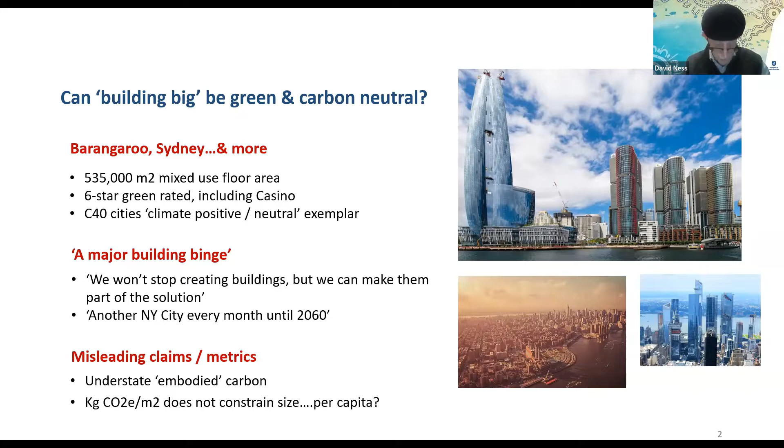So the urgent need to bend the curve. Meanwhile, the Intergovernmental Panel on Climate Change stresses that aggressive and immediate mitigation policies with rapid and deep changes in demand are required to bend the emissions curve by 2025 and limit warming to 1.5 degrees. So that's a very strong message from the IPCC.

Sorry, I'll just go back again. I missed something I wanted to say. And this applies not just to climate, but other forms of pollution and biodiversity loss. And not just to buildings, also to lifestyles, including mobility, our food, clothing, etc., and also, of course, infrastructures. But to achieve 50 to 60% cuts in building carbon by 2030, as UNEP argues we need, drastic and different actions are required.

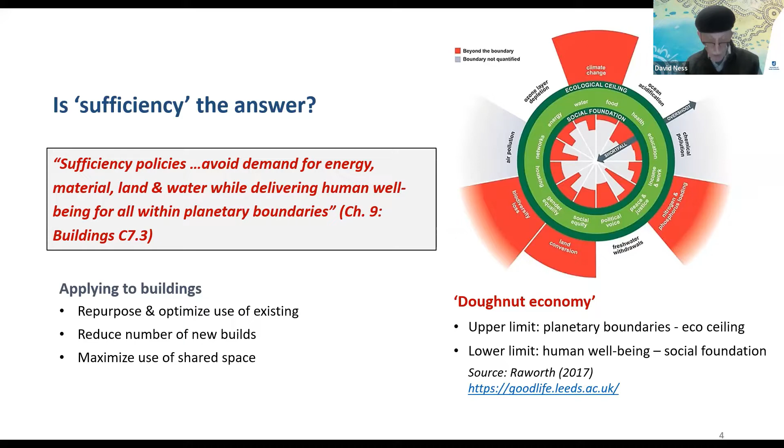And sufficiency in building, as I've noted there, includes repurpose and optimise use of existing buildings, reduce the number and floor area of new builds, and maximise use of shared space.

Yamina argues this reduces the cost of buildings without reducing well-being. And also, while efficiency is incremental, sufficiency can achieve a major shift. Pardon me.

So I wish to put forward this proposition. We can only bend the curve by 2025 if we drastically reduce the amount of new construction and floor area by not building at all, building less, or adapting existing stock, and if we begin in the global north.

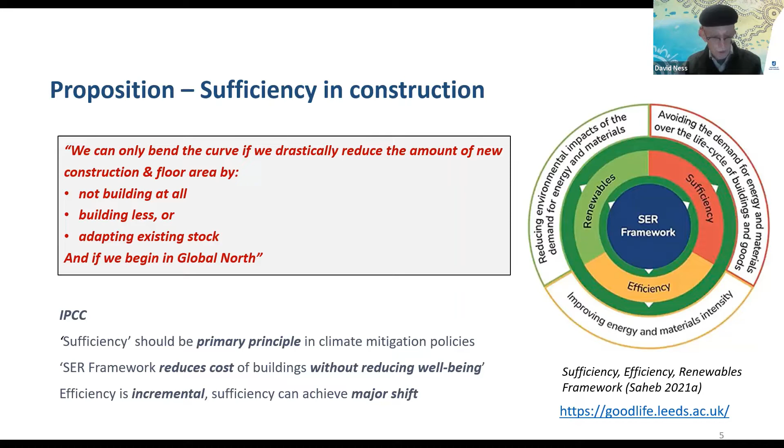The importance of early decisions in achieving this. To make drastic cuts by 2025, we must influence upfront strategic decisions.

This carbon reduction curve is actually from 2013, but it's also reflected, I think, in the standard PAS 2080. It shows more carbon can be reduced in the early stages of projects, especially upfront carbon associated with new construction. As I understand, this is responsible for around 70 to 80% of life cycle embodied carbon.

A build nothing decision in the early planning phase may achieve 100% reduction by challenging the need and exploring alternatives to achieve the desired outcomes. While build nothing may achieve 100%, build less can reduce carbon by 80% by using or adapting existing assets.

And going down further, building efficiency or build clever, such as with low carbon materials including timber, can only achieve 20 to 50%. But this bottom area is where the industry is focused. But a 50 to 60% cut in carbon is required by 2030, as I said before. So I'm arguing that our attention must really shift to this top area, the top left.

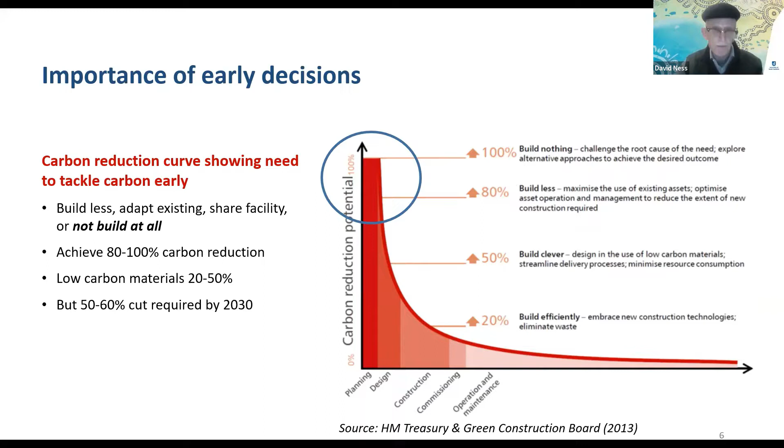So what are current policies and what kind of shift is required? Circularity and net zero, not enough. You may not agree with this, but this is what I truly believe.

Current practices are a long way from sufficiency, as we saw in the first slide showing growth in commercial real estate. And although sufficiency is related to circularity, the IPCC states, quote, claims on the benefits of circular economy for sustainability and climate change mitigation have limited evidence.

This may be because circular economy, as practiced, often does not achieve absolute reduction in consumption carbon and is seen, such as by Ellen MacArthur herself actually said, as offering better growth, not avoiding and reducing consumption and growth.

But circular economy, of course, has its place. And my colleague Ke-Jing and I, as Jeremy mentioned in the intro, cooperated with Arup in adapting circular economy to the built environment and developed a platform for reuse of components.

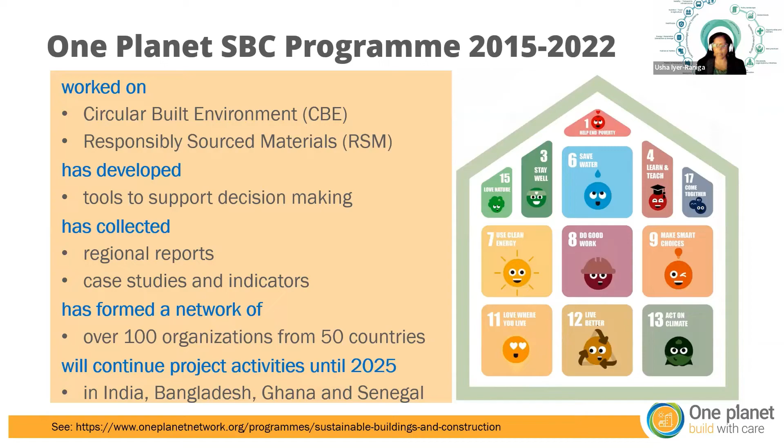So let's pause and focus on why we're looking at the built environment sector. Why is it so critical? Well, because we know the built environment is a high resource use sector. It's got a very high environmental impact, but it's also a major source of environmental harm. We know the built environment consumes about 40% of global raw materials.

And it's not just in the construction phase of buildings, which is a point David made, but we also need to think about resource use during the operation of buildings. Increasingly now, I think we also need to think about end of life of buildings - how do we design buildings so we can deconstruct them at the end of life and reuse those materials as much as possible, along with other things David mentioned, such as building more modular, flexible buildings that can become multifunctional over time.

We also know that in the process of operation of buildings, 30% of waste is generated, and this waste has to go somewhere.

So if we can start looking at reducing that waste, or moving towards zero waste, is something for us to start thinking about. We also know that it's not just about solid waste, but also liquid waste and the use of water in buildings - not just at the point of construction, but also in the operation of buildings.

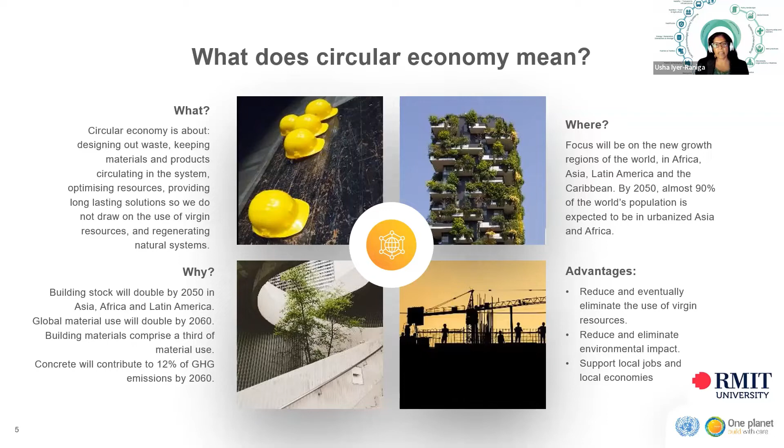So what are some of the ways for us to think about this? We know that some countries have responded to the Paris Agreement through nationally determined contributions and have put buildings and construction or the power sector front and center of signing up to ensuring that changes are being made within their own countries. But we also know that a lot of work is being done, particularly by the Global ABC, but also by UNEP and organizations like the International Finance Corporation, in looking at how we can bring in energy efficiency practices, green codes and green building practices into some of the developing world.

And I think that's a really important starting point because it acts as a level playing field. We also need to start thinking about how do we ensure that we start increasing the stringency over a period of time.

It's not a case of developing building codes and then not having a good mechanism in place for ensuring that these policies are actually policed, so that they actually give us the results we're looking at in terms of energy efficiency reductions and so on.

We also need to start thinking about the role of planning and building, because our cities don't exist on their own, they're not just a conglomeration of buildings. There's infrastructure, there's mobility. We need to think about all the different scales: the building scale, the neighborhood scale, as well as the city scale.

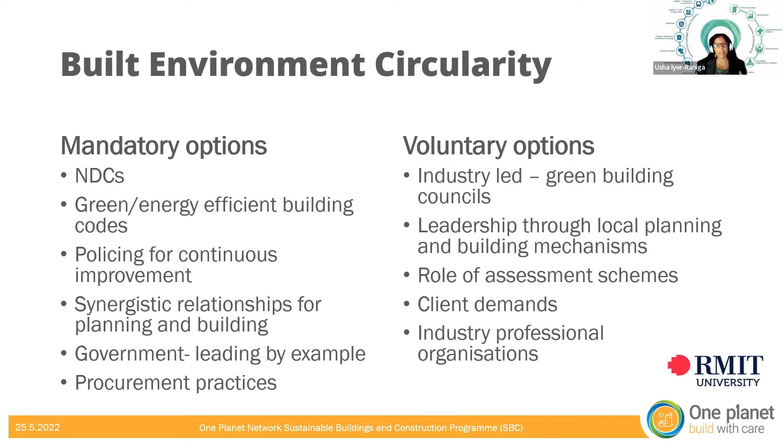So let's just look at the work that we did leading to the state of play reports, and the work that we're continuing to do.

It started off with presentations that we made in 2017 and 2019 in a pre-COVID world, where at the World Circular Economy Forum we started having discussions focusing specifically on buildings and the built environment. As I said before, that led to 7 reports and a global report, covering Europe, North America, Oceania, Middle East, Asia, Africa, and Latin America.

In addition to that, we also deployed an international survey where we've now got close to 200 responses from North and South, with about 82 responses from the Global South. And then we validated some of the findings of the surveys through workshops across Asia, Africa, and Latin America.

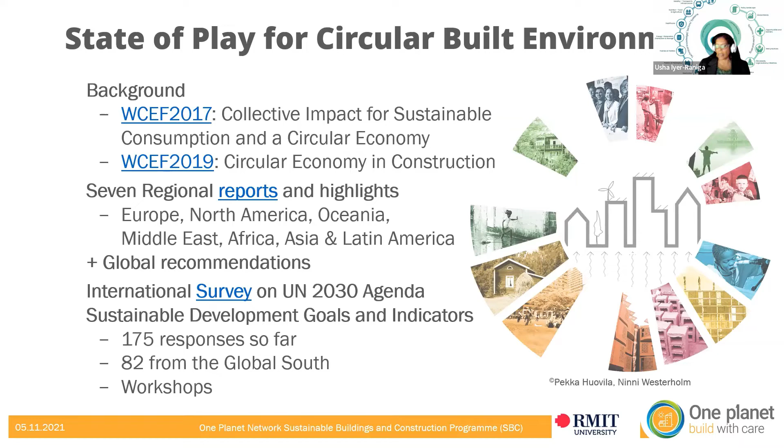So just very quickly, I'll go through some of the recommendations - 10 recommendations that have come out of these 7 regional reports, which we brought together with a global report.

Firstly, the really important thing is to start thinking about moving away from linear systems of operation, because if we don't recognize what the problem is, we're never going to be able to move in the direction of circularity. We believe that using the Sustainable Development Goals is a valid and good starting point to monitor, evaluate, report, and keep that as a way for us to fine-tune and build the stringency over a period of time.

As I've said before, we need to think about life cycle at the outset, because we're becoming quite good at energy efficiency. But then, the more energy efficient we become, or as we move towards net zero, the role of materials and the role of embodied energy becomes even more critical.

So at the moment, in Europe, and even in some buildings here in Australia, up to 40 to 50% of the full life cycle is about embodied energy. So it becomes really critical to start thinking about how we treat materials, what materials we use, how we build buildings, and how we ensure that we do not have waste resulting from the process of construction.

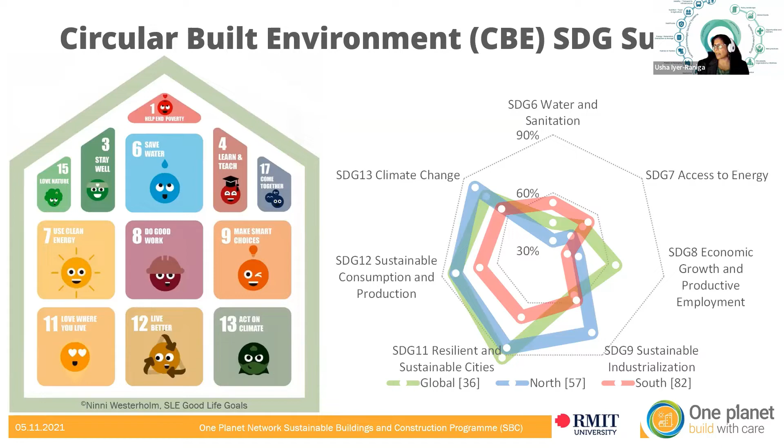We also see that SDG 9 and SDG 13 are also scoring quite high in the north. SDG 6 on water, SDG 7, is another area that comes into consideration when we think about both the south as well as looking at it from a global context.

Then when we look at the overall level, we also see some considerations around the importance of health, biodiversity, and partnership. SDG 17 scores really high globally, whereas SDG 3 scores very high in the south, and again SDG 15 scores very highly in the north.

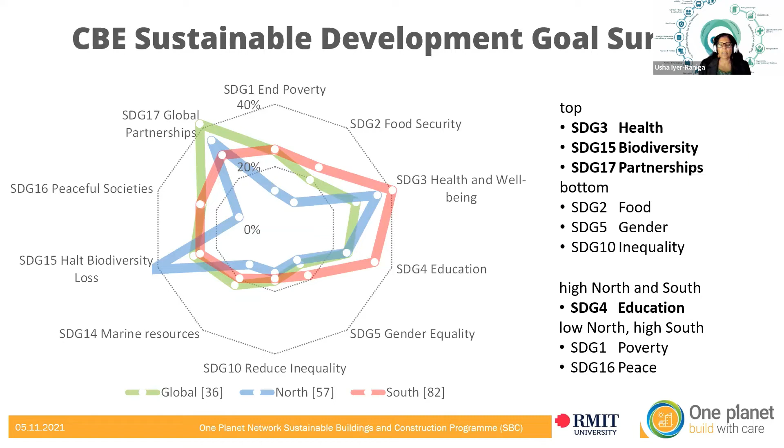In both the north and the south, the role of education is also quite important, and I think this is quite a good signal for us to take away. Given that this is looking at built environment, it's not surprising to see that food, gender, and inequality don't score quite as high.

When we started looking at an indicator level, we were really keen to understand what are those core indicators that would signal as important for circularity. What we found was that material footprint, which is the same indicator on 8.4.1 and 12.2.1, is important, as are rates of recycling and the use of local materials, which sits under 11.c.1.

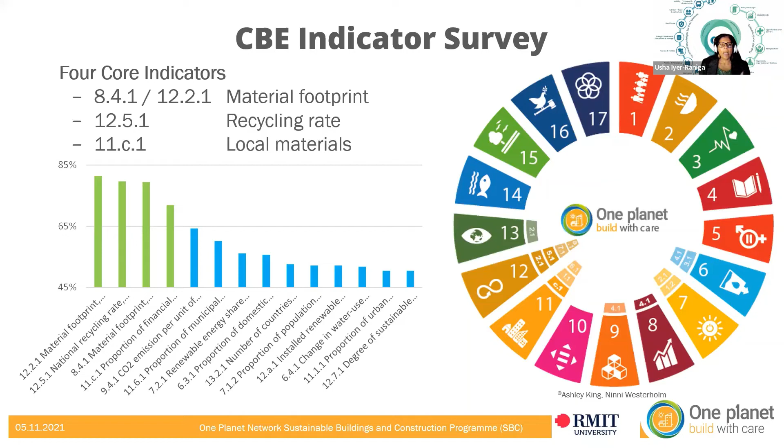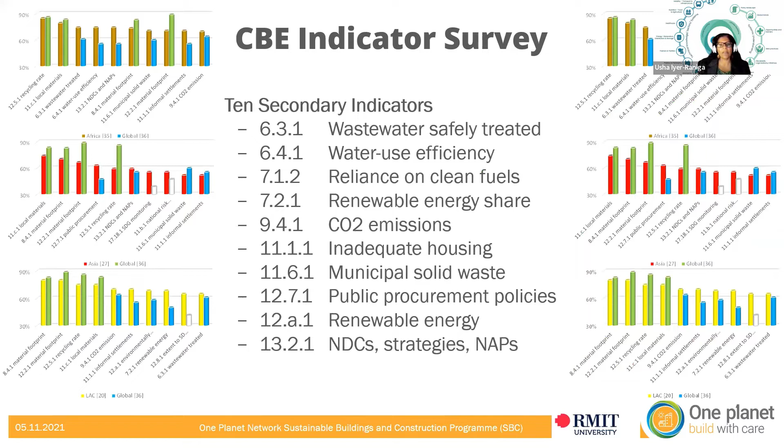And then a range of secondary indicators, looking across water, energy, carbon emissions, cities, housing, and also on consumption production, but also on climate change. So these are the other 10 secondary indicators that rank very highly in the work that we do.

So where to from here? The work we're doing is now looking at increasing the amount of case studies that we have done. We've gathered case studies, and you'll find all of this on our website. We've got case studies from a number of Asian, African, and South American countries.

But we're also looking at, rather than working just with governments, can we also start looking at working with industries, and start looking at how some of these indicators can be used for reporting at a project level, because a lot of industries are looking at how they might report SDGs. It's a good way to bring project level thinking into reports that companies may sign up to as part of ESG reporting on SDGs.

Last year we launched the latest report at COP26, but we're now looking at developing that further to scale up beyond the countries that were part of our case studies, to include a further number of countries and increase the sample of case studies.

But we're also interested not just in north to south learning, but also south to north learning. There's some really interesting work that came up in one of our meetings in Amsterdam, where some of the indigenous type of thinking and learning can also be applied into the northern context, but also between the south and the south.

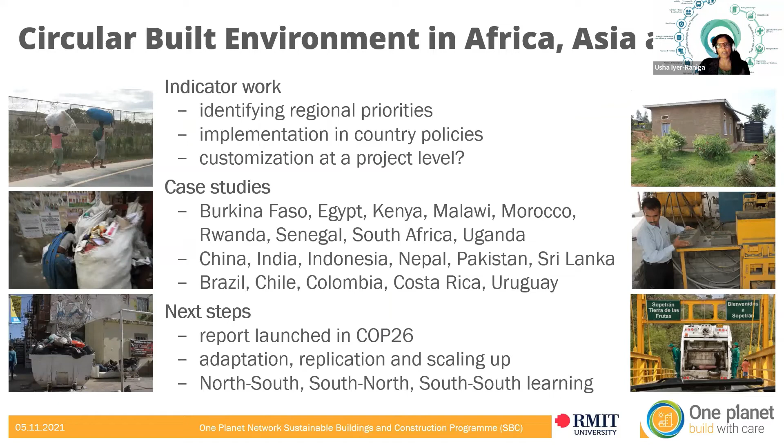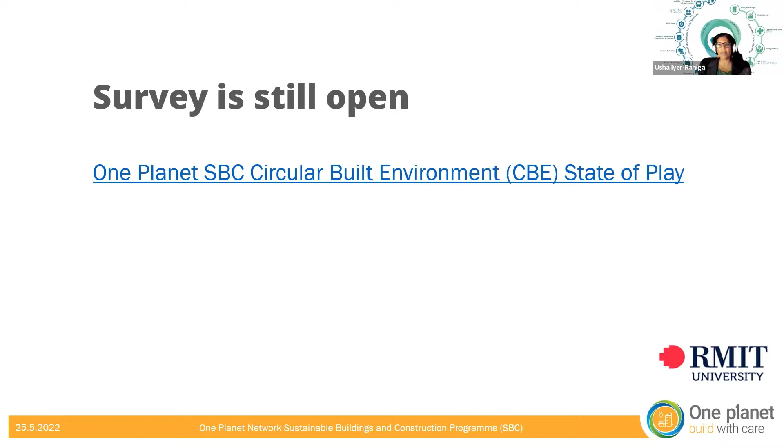So I just wanted to let you know that the survey is still open. If you're interested in responding to the survey, we would certainly appreciate that. And if there are any questions, I'm happy to take that at the end. I'll leave it there.

I think I went a few minutes over, Jeremy, so apologies. Thank you.

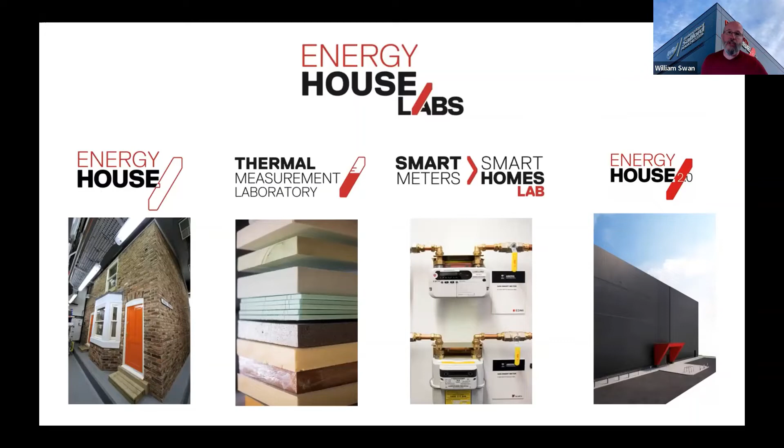And then the last facility, which is an extension of the original Energy House, is Energy House 2, and I'll give you some more detail on that. So in the UK and Europe, Energy House is what we're famous for.

Really, we developed it to address the retrofit problem. When we started in 2011 and constructed it, we were really focusing on the UK. We were quite new to energy in buildings. We had buildings experts, we had physics experts, but I wouldn't say we were building physicists or building performance experts.

So really, we were trying to look at retrofit as an innovation problem. I think where we were seeing what was going on in the UK is there was an awful lot of modelling, and we were saying we were hitting certain targets in terms of energy efficiency or carbon reduction, but actually we were using regulatory, quite light touch models, and we weren't measuring anything to any great extent.

I think the thing that we do an awful lot of is a lot of work with industry, and we do a lot of work with other universities because of the unique nature of the facilities. We do a lot of partnership work, and we're very outward facing. So why is it different?

I think there are two ways to test if a product or a system is working outside of the Energy House model. The first is a bench test. You create an artificial test cycle with the product in isolation. But what that doesn't do is put it into context. It doesn't tell you how the product operates in interaction with the whole system.

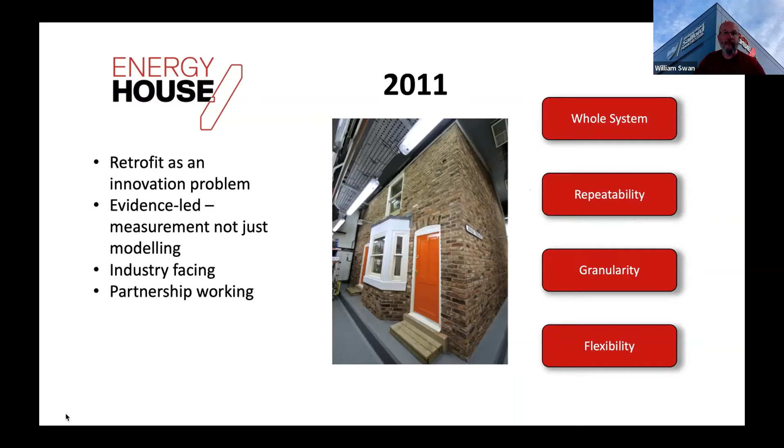I'll be quick here. This is a project we did in 2013, and it was a pure fabric retrofit. We did solid wall insulation to the side and back of the property, floor membrane and insulation, topped up loft insulation, doors and windows. And then what we were able to do is take one thing off at a time and test it under exactly the same conditions.

This had never been done before. There was an attempt to do it in the field by Nottingham University, and they struggled because of the weather conditions. But this was an ability to say we could do stepwise retrofit, and we understood the risks and the joys, because retrofit's not just about energy efficiency, it's about comfort, it's about building pathology as well. So that's really where we started that kind of retrofit problem.

And this was with a partner who funded it entirely themselves, and they did 2 retrofits - this company called Saint-Gobain, who are the world's biggest manufacturer of construction products.

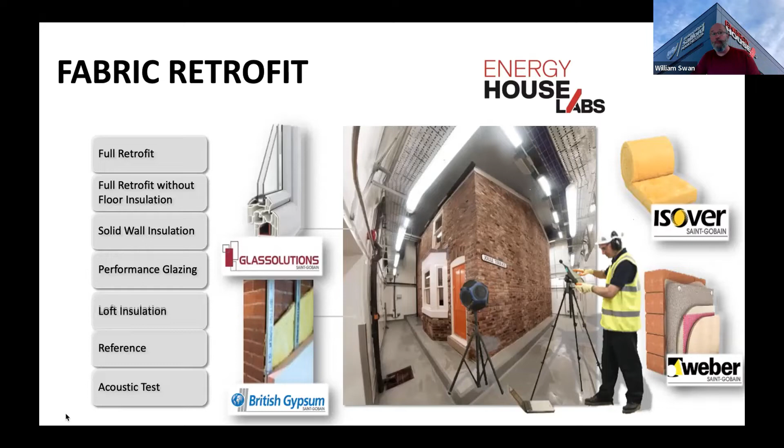And here's a slightly different thing that we were able to do. So when I touch back on that smart element, it's actually about how do we use not just how much energy we use, when we use it, what's its carbon intensity, where it comes from, how can we control and understand it.

So what we're seeing in the UK, alongside the rollout of the smart meter infrastructure - and this is true in other countries as well - is a rise in the use of electric vehicles, more people having renewables, so an increase in mainly photovoltaic solar panels, and the use of batteries. We're also seeing the electrification of heat.

On top of that, the pricing system is moving, particularly in electricity, to not a fixed price. We're seeing what we call an agile tariff or a half-hourly settlement. So we've gone away from consuming gas and electricity and paying for it at a fixed rate at a certain time. People used to just be consumers, whereas now people are generating, storing and consuming energy, and potentially trading energy and offering network services - i.e. allowing the energy companies to turn items on or off or draw down from their batteries.

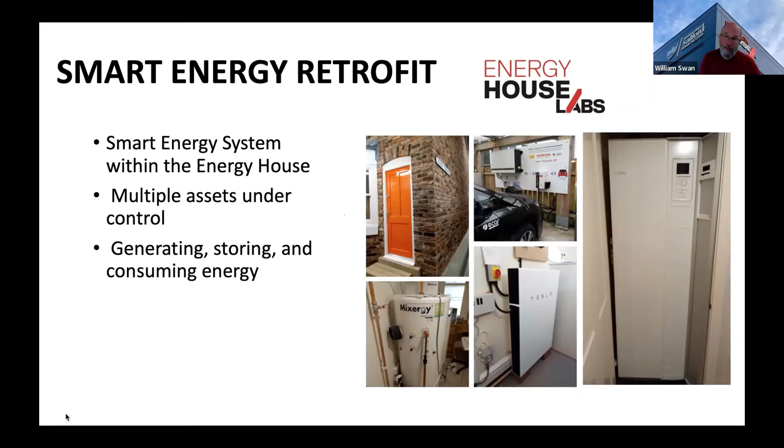We had to open the door of the Nissan Leaf every half an hour to keep it within the system, otherwise it shut down. So a lot of these, what they're now calling energy smart assets, particularly in the UK - there's a new standard approaching - actually optimize for themselves, when what a consumer actually needs is an optimized domestic energy system. So that's a really interesting area that we started working on.

So when we get to 2021, we're all a little bit more informed about the situation. We've been around for sort of 10 years, or probably a little bit longer now, probably coming up to 13. So really the issues that we're interested in have moved on a little bit.

So it's broader, there's a much bigger team. Obviously there's 15 of us now, 4 laboratories, as well as external research work. So we're thinking about decarbonisation, but we're also thinking about adaptation, and we're particularly interested in issues around overheating and climate change and the response of energy efficiency buildings to that.

We think modern methods of construction are probably going to be fairly essential to deliver the future home standards that we need. Low impact materials - once we get operational energy down, embodied energy matters, and there is a new part of the building regulations in the UK called Part Z, where a life cycle assessment of the embodied carbon is going to be considered.

Energy system transitions, so a move away from gas, which is still more than 85% of the UK stock, and all the way through Europe, to electricity, clean electricity and decarbonised electricity, potentially hydrogen, maybe not in housing, and also things like district heating.

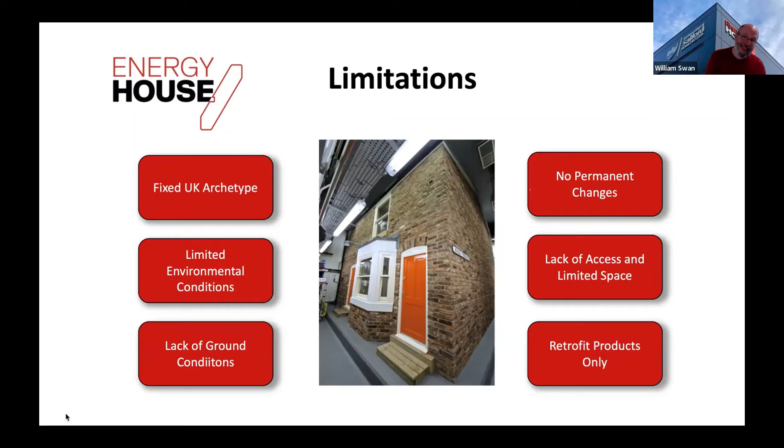The other thing is we can't do permanent changes to it. So if we can't get it back to its original state, we can't do anything with it. So things like coatings or some of those innovations where you can't get off the fabric, we've had to step away from. The fifth big point is there's limited space around there, and some of the environmental conditions, particularly wind, don't work as well as we would like. But also it's for things like tours, engagement with students, engagements with industry visits. Because it wasn't a purpose-built chamber - it used to house a physics experiment - there is a lack of access and viewing. And I think the other thing is we're only ever really dealing with the product manufacturers, and that in many respects is not necessarily the problem, it's where it all comes together.

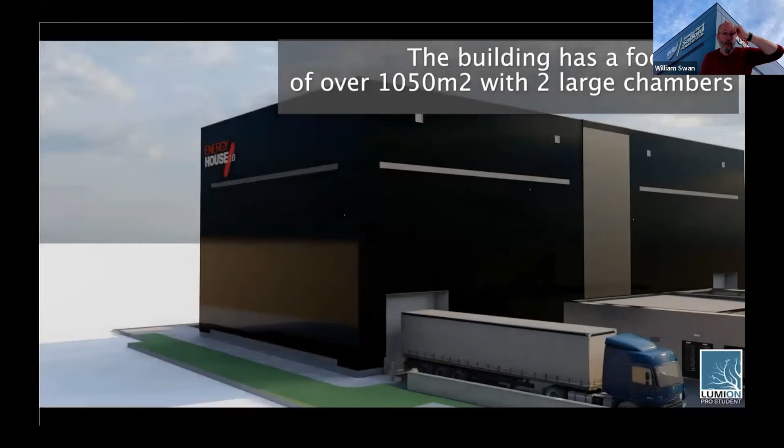So this is a visualization of the facility that we've built now. And so really what we have is 2 large chambers. In terms of chamber volume, this is 20 times the size of Energy House 1. And I think they're 2 of the largest environmental chambers in Europe.

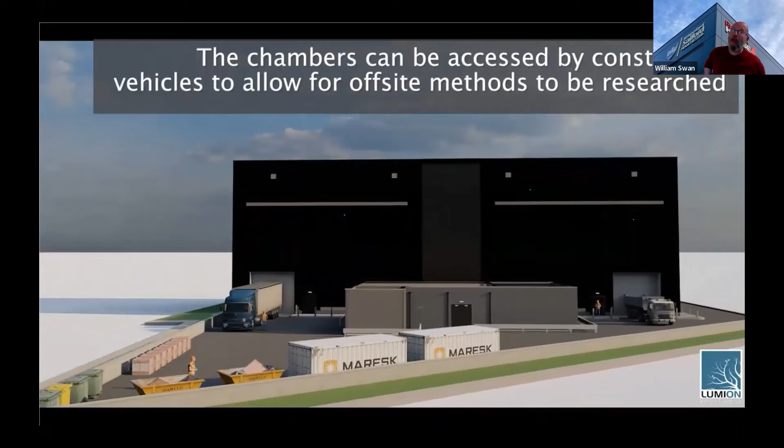So the idea is that we can go in and we can build whatever we want. We can build small commercial. Actually, Energy House 1 was built by carrying everything down the corridors of a university building. And when we accept the scale of the problem, that's not a very professional way to operate.

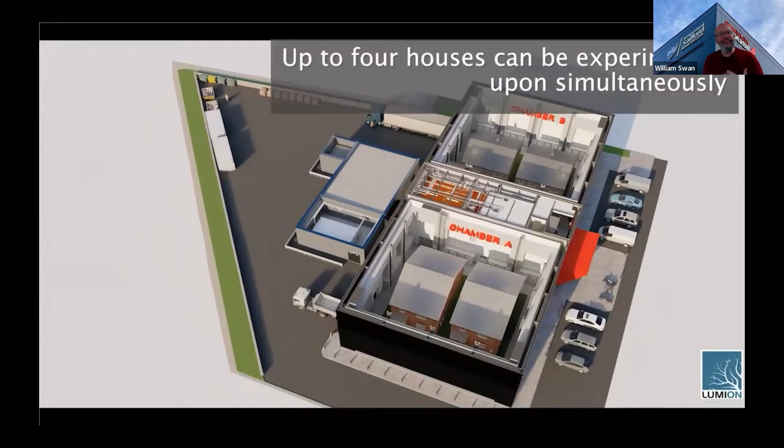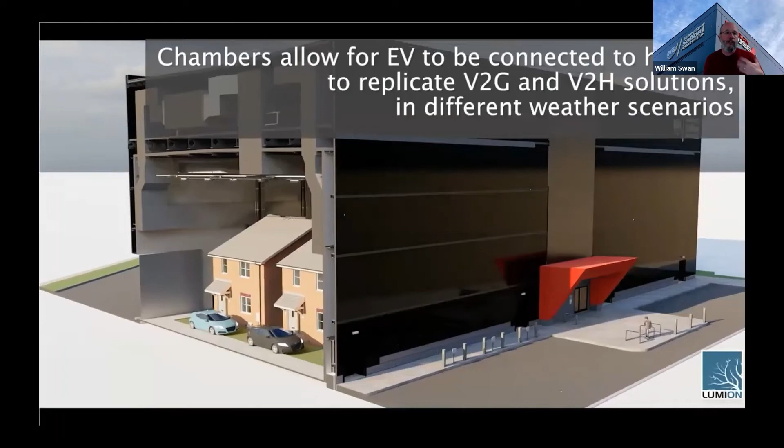So what we can see here is we've got 2 houses in each of the chambers. We're just entering a demonstration fit-out period where we will be building actually 2 houses in one chamber and a passive house flat in the second chamber. So you can see with the cutaway, the scale. The idea as well is we can also get cars in there, because we see EVs as part of the energy system.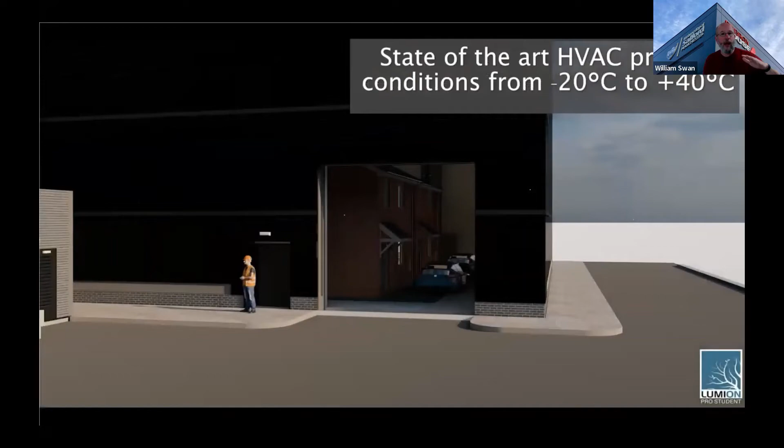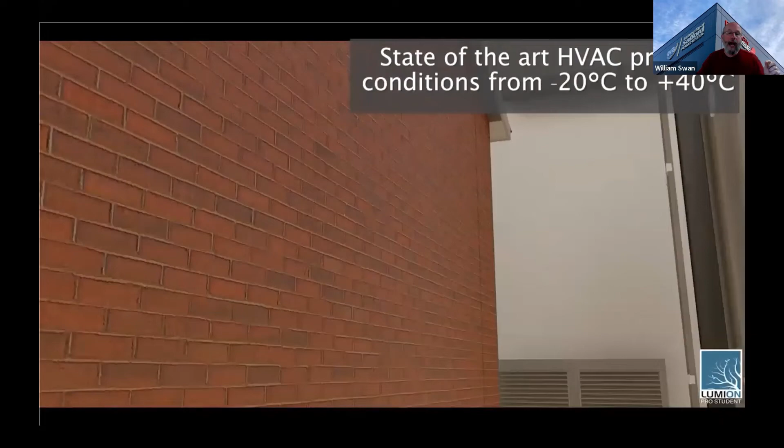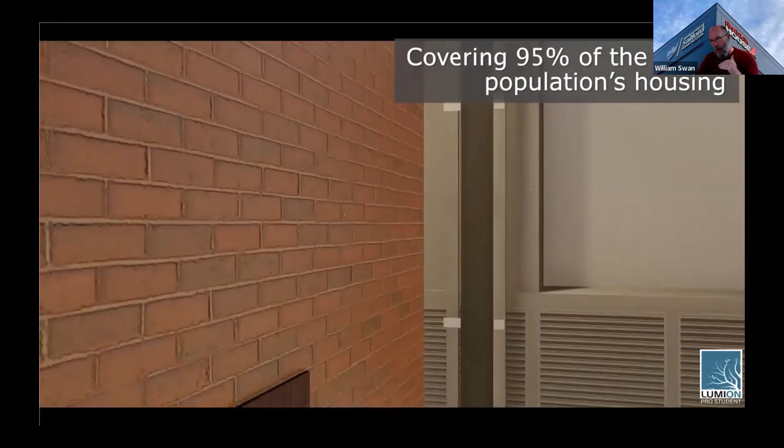And then we've opened up the weather conditions, so -20 to +40, which we can do under control, still keeping it within 0.5 degree. Although we do have the ability to go higher and lower, it's the 95% of the global population. And actually 40 degrees is really where we decided that heat stress can start kicking in.

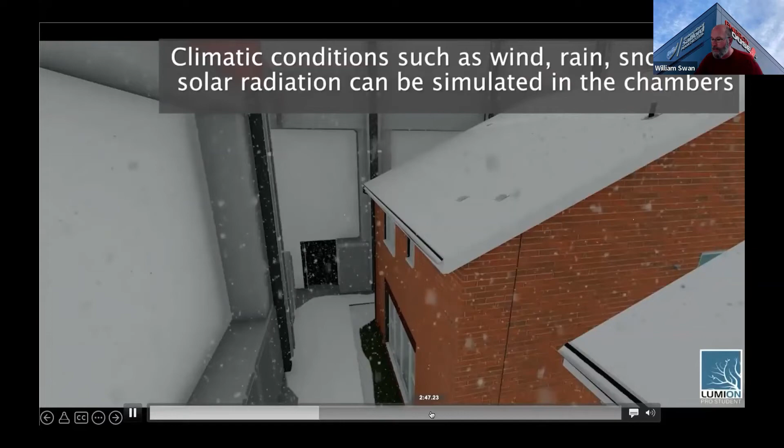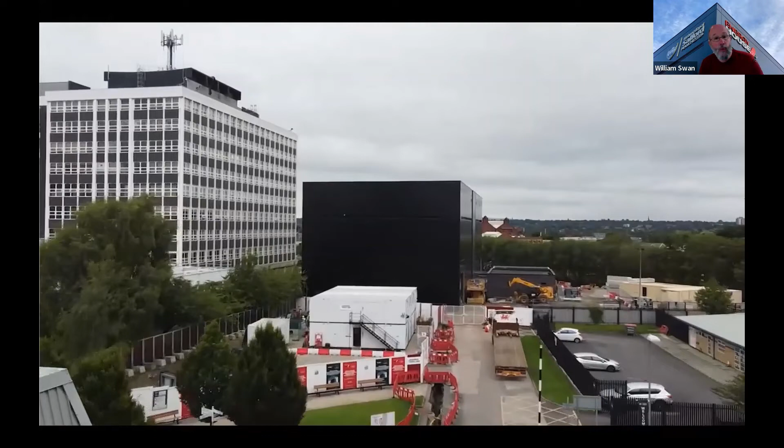So this is drone footage of what we've actually built. This is right at the end of the building period. We have commissioned, and we will be starting construction inside on June the 6th with the first 2 houses.

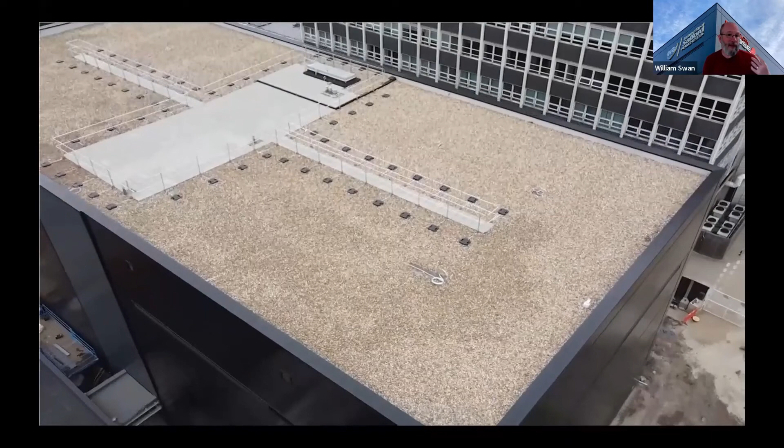We're building 2 UK starter homes with the UK's first and fourth biggest house builders, working together. I think that's a reflection of what's happening in UK policy, particularly that developers are having to invest in research and development now, which they've never done before. You can see it's one of the few buildings that closely matches the visualization.

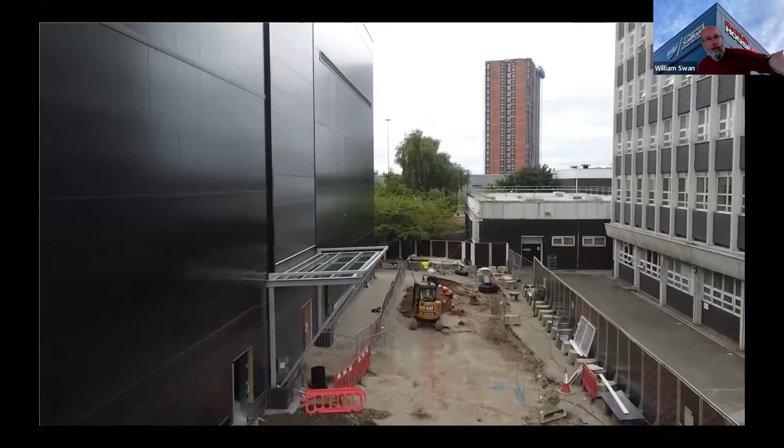This is the front of the building. You can see there is a central core and then 2 large chambers at the outside. The whole build took about 76 weeks.

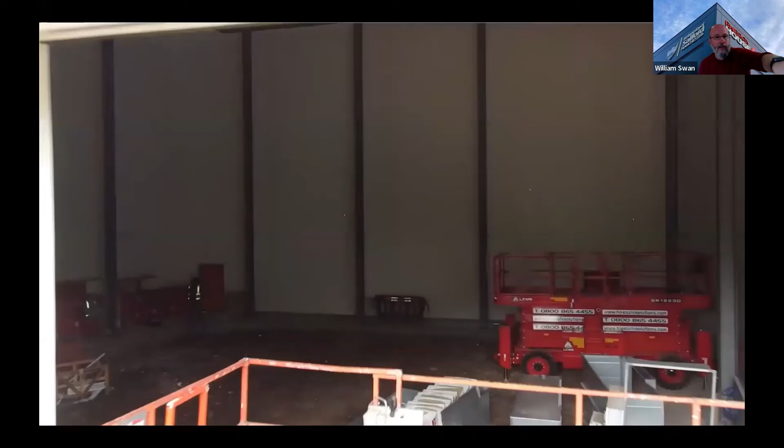You can see the chambers here. The buildings will be built on an insulated pit, which is isolated from the ground. We can see some of the HVAC equipment. Of the 12 million build, about £6 million of it was heating, ventilation and air conditioning equipment.

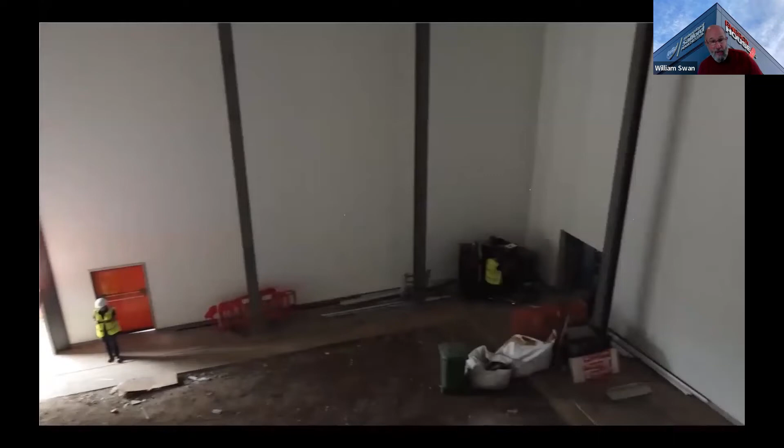There are 2 identical plant rooms above each of the chambers, which I think are just towards the end of this demonstration. You can see the plant room being constructed here.

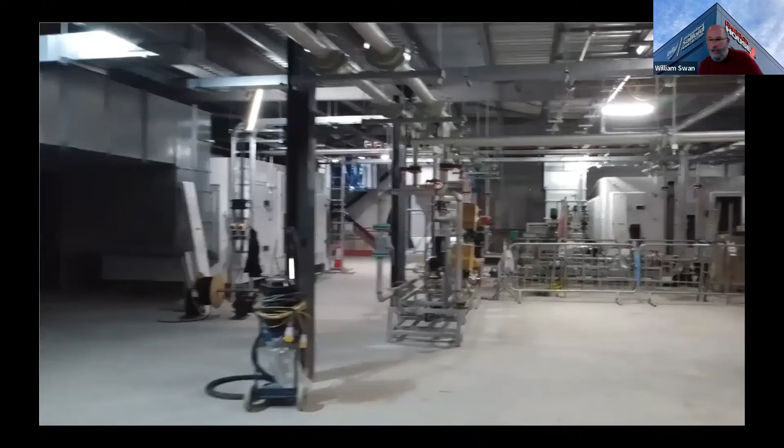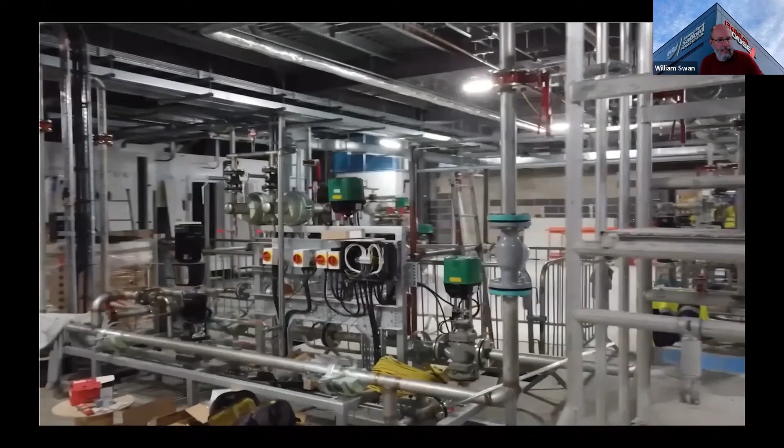From our point of view, this opens up international applications, it opens up any building or house type to the principles that we found very successful in the retrofit space. We really feel that we've got a year of demonstrators, so we'll have those 3 properties in there for a year so that people can understand the principle.

Then in the following year, from July 2023, we'll start commencing products, and we're working with partners now to pull products together. If you bear with me a second, I'll go to my last slide.